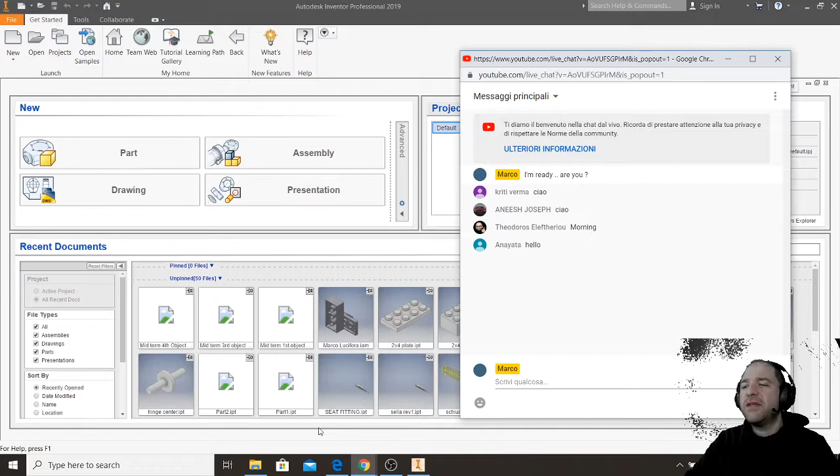Just in case you want to know, it's been 10 minutes that I was talking to the camera, and I thought I had removed that screen that says 'live in 10 minutes.' So I was already talking to the camera, and I didn't realize no one could hear me because I wasn't really streaming anything. There was just a screen saying 'live in 10 minutes,' but I was already talking, pretending, 'Hey guys, are you there? I'm ready, I'm pumped,' and so on. Imagine. It's fantastic.

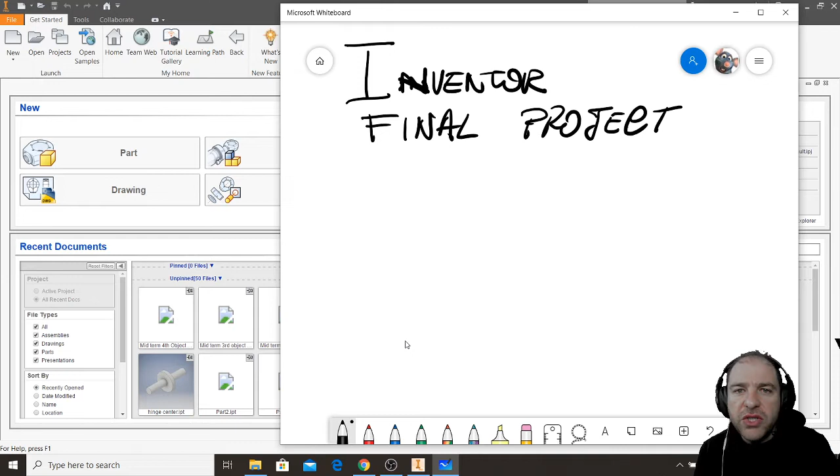It will be this. All of you may have a slightly different interest in using industrial design. There are maybe students who are more into furniture design, product design, and design of electronic things and stuff like that. So what is my goal? My goal will be you

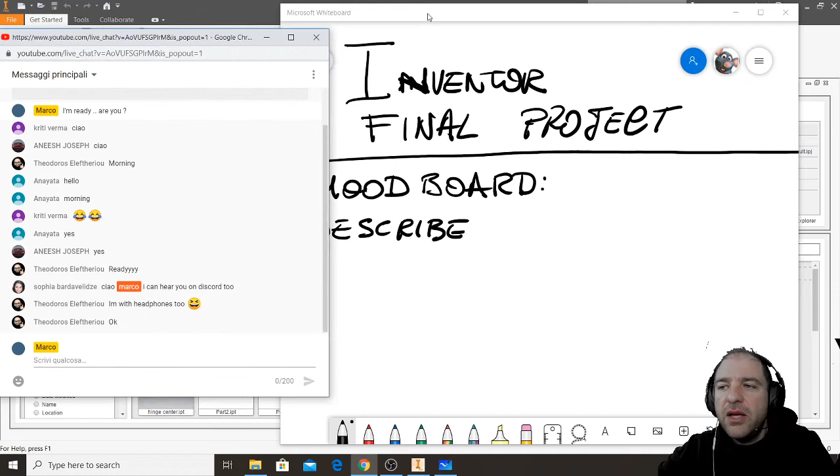need to create a mood board, and in this mood board you have to describe an object of industrial design that you are interested in designing. What it means: let's say someone wants to make an armchair, someone wants to make a bookshelf, or someone wants to design a lamp. Whatever is the object—a boat, a vehicle, whatever—you have to describe the object that you would like to develop in order to use it as the object for your final portfolio.

So when you go to a client, a potential client, and want to show your portfolio, instead of having all the same project like school projects, this will be something a little bit more personal, something that comes from your particular design interest.

You have to start by explaining which kind of object you would like to design, using whatever method you prefer. What it means: you can download existing pictures, you can start designing your own personal object by making sketches, by making very rough 3D models.

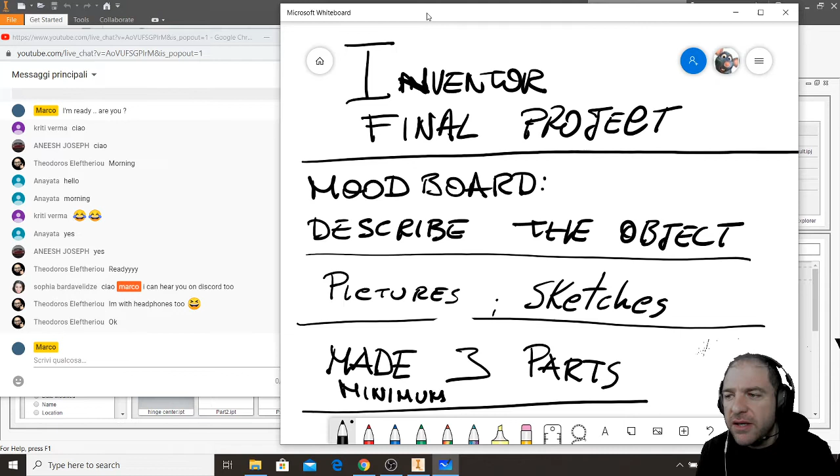For example, last semester I discovered that all my Inventor students made lamps. What is interesting is that they were also able to make prototypes of their parts by 3D printing some pieces. Since I haven't forgotten that this is also a class about 3D printing, I would like to make a very interesting experiment.

You have to design your piece, and after the break we will make a specific lesson about 3D printing. I will explain what you have to do, which software you need, and after the break, when you design certain pieces, I will try to go to the school and 3D print some of your small parts, so that during class I can rotate them into the webcam, show you the criticism, show you the main problems that the 3D printing process has, and so on.

So we will try—I will try to 3D print some of your objects, print some of your objects.

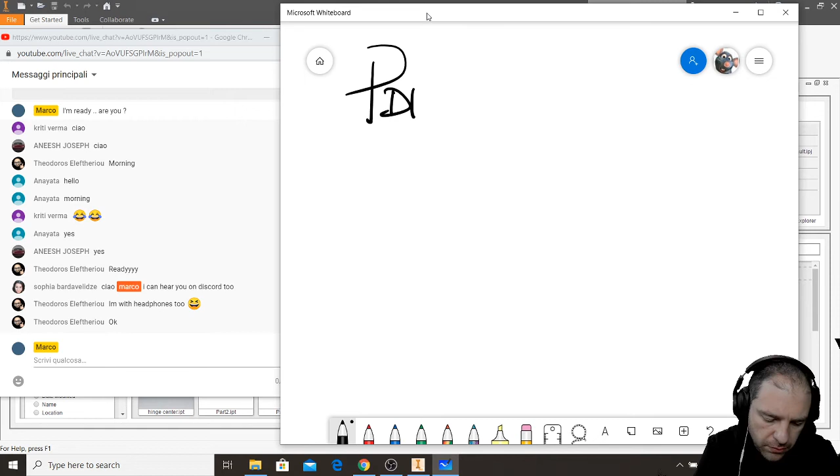And this is my goal. Okay, so last but not least, to have all complete information: the mood board you have to create, and this is what you have to do for these two weeks, must be in PDF format, and it has to be made of at least 3 pages A4, containing all information needed to understand which project you want to create. Sketches, information, description of material, description of the function, if it is an electronic device or not.

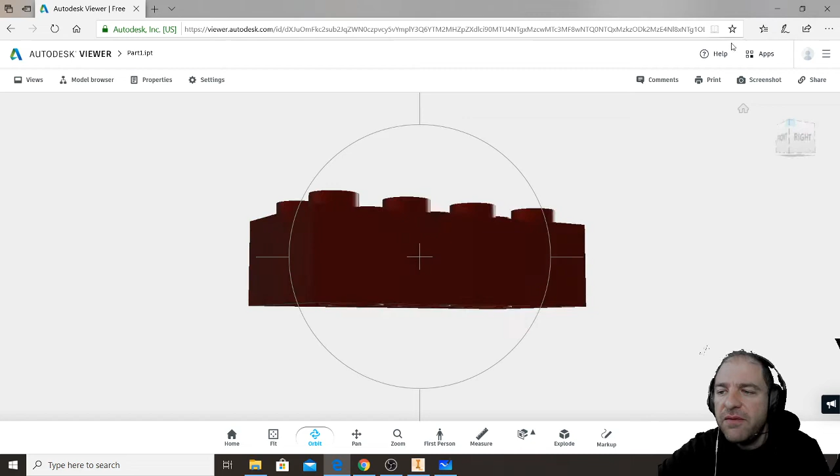We are almost there. And basically, even if I don't have the software with me, or especially if you are working with Mac and Windows and you don't want to switch from one platform to another, boom. But in here you have also the chance to check whatever Autodesk file format for free.

This is also interesting because some students ask me, can I keep like 2020 and so on? And I say yes, because it is always possible to open files even if you don't have the app. And you have some interesting tools, like you can orbit, pan, zoom, but you can also measure. So I do this not only to open files, but I can also check if they are correct or not. You can also make sections somehow, press escape, that I forgot how to do it.

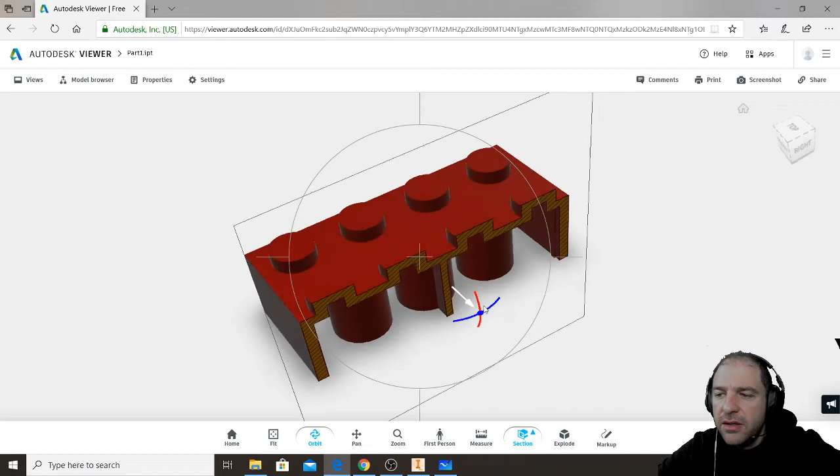Exactly here. Then I can rotate, for example, like this. Perfect. Then I can use the Y plane, I can rotate it, and exactly slide the section plane to see how this 3D model has been done, and so on. So this is a useful resource.

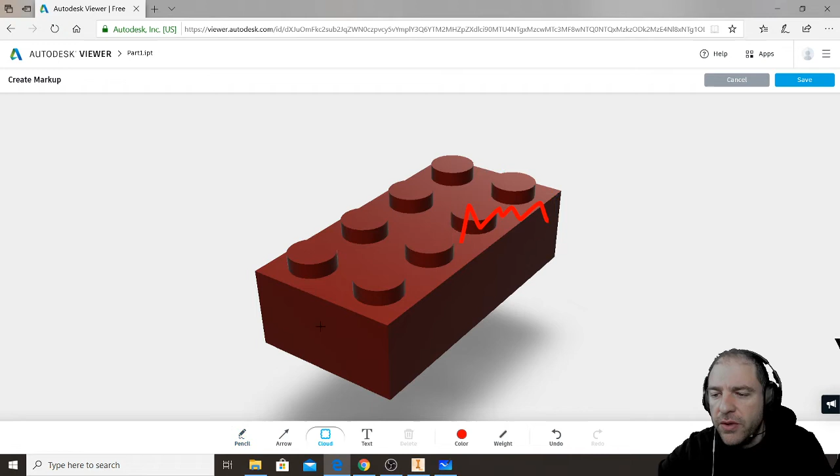If this was an assembly, for example, you can explode it, so you can split all parts. This unfortunately is just one part, so you can't do it here. You can also mark up, adding notes and then save these notes so you can use it as a reviewing tool even if you don't have apps with you. You can add cloud shapes, check marks, arrows, and so on. Okay, and this is this simple free tool that you have.

You have also, when you log in here, more web apps that you need to know, like BIM 360 Team, so if you are running Revit projects, you can share things with other people. But what is more important is that you have also Autodesk AutoCAD 360 and Fusion 360, which are basically AutoCAD online, and Fusion 360 is simply more or less a web version of Inventor. So again, if you don't have your laptop, whatever computer you're running, Windows, Mac, and so on, these are web apps and you can also use them.

For example, now I don't need it, but with the viewer I'm only able to see the file. But if I use AutoCAD 360 or Fusion 360, I am able not only to view but to open this file, adjust it, maybe save it with another format, and export it, and use this part for the software that I have. Okay, so this is extremely important because web apps, just by having a decent internet connection, allow you to work wirelessly, no matter where you are, no matter which software you need, Autodesk related of course.

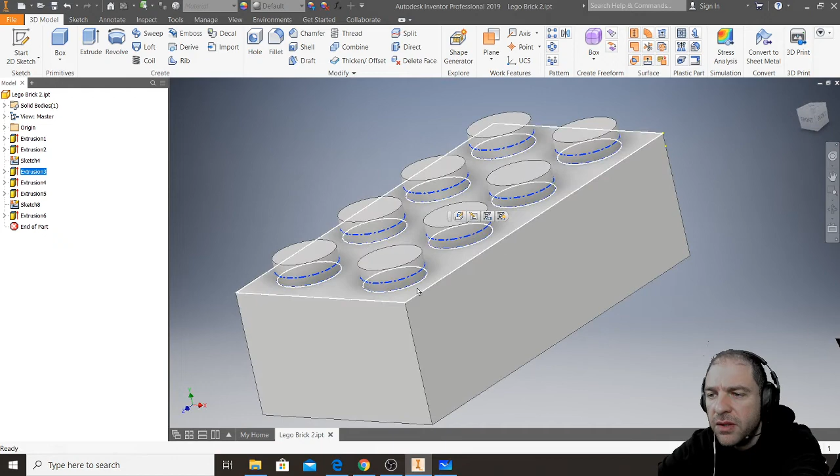So this is an extrusion that goes to... this is another extrusion made by these parts in here. This is another extrusion. These are other extrusions. This is a sketch, this is this. Okay, this is interesting. Look, to see how this object has been made. I mean, those are copies of your files, I'm not ruining any of your original files, but I want to show you this.

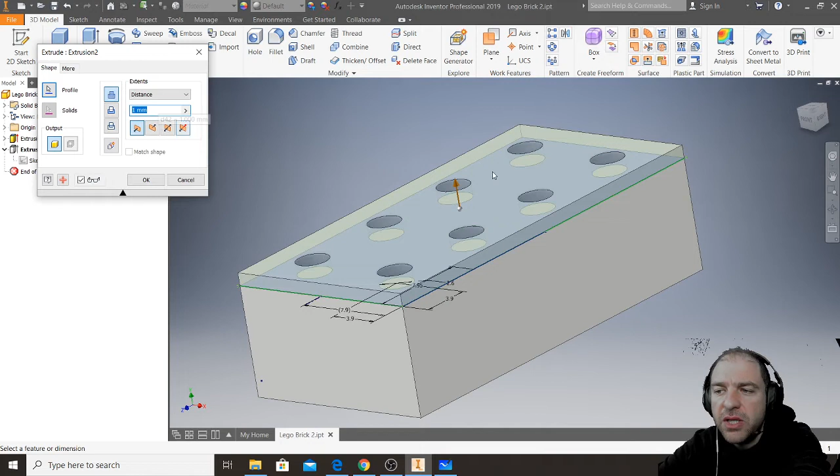So if I check how the file is made, I will discover that this is the cap that has been extruded 1 millimeter. While, and I can delete it now, this is a very complex extrusion that has been made by drawing this entire sketch with dimensions, okay? And then it has been pulled up.

Where is here the downside? I mean, why, maybe this is quite correct, but why does this become something a little bit complex to manage? If I want to make another Lego block, this is the one, let me open the pen also, big pen. This is a brick that is called, this is called 2x4 brick.

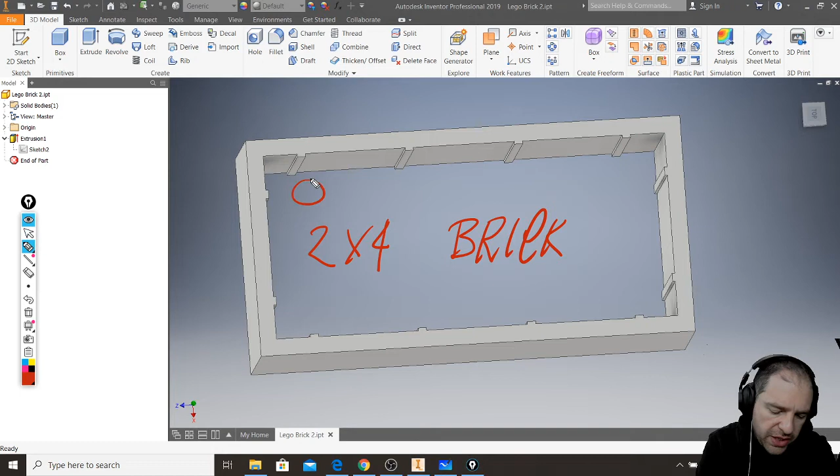In Lego dictionary, this has a very precise meaning that says it is an object that has 8 cylinders. There are 2 on the short side, 4 on the long side. It is called brick. So what it means is that the height of this will be a multiple factor of 3 elements.

And in Lego there are bricks and there are plates. A plate is one module. If you put 3 plates on top of each other, you obtain a brick. So there is something like a modular aspect of Lego blocks, and also they change dimensions. So there is like 2x2, 2x4, 2x3, 1x4, 1x3, 1x6, and so on.

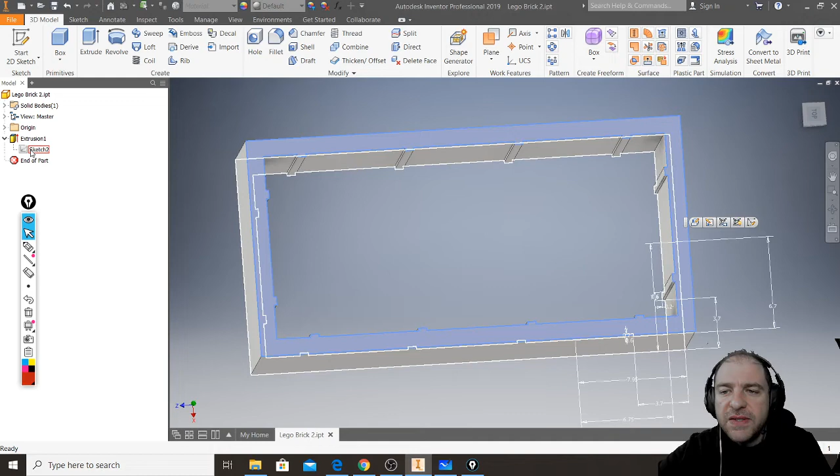So where is here the only small negative aspect? The negative aspect is that if I want to change this and make it shorter or longer, this sketch, look, contains all these details, and it's simply a sketch that will take forever to be modified, because if I cut it, let's say here, and I want to make only this part, I have to cut it, move it, delete this small part, delete this small part, and so on.

Let me show you another interesting thing. Not because it is better, but because it is a little bit more reliable.

Okay, so let's go. Let me show you how I did one of these. That is this one. Look.

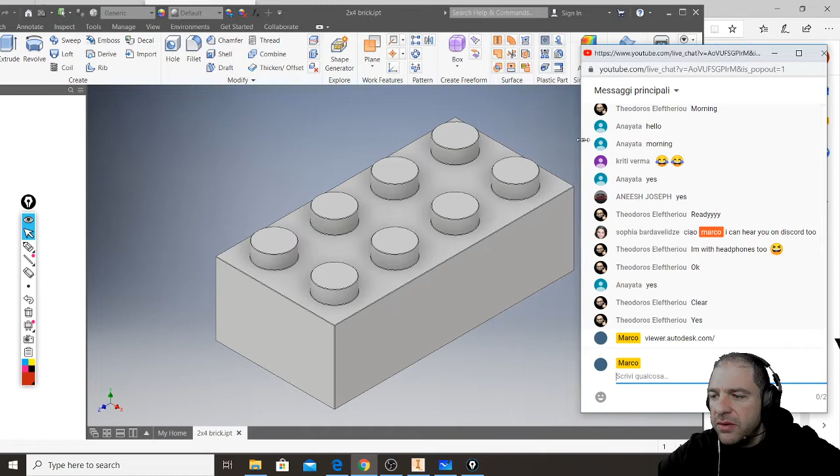So let me show you my Lego block, just because it can be interesting to see other ways to do the same things. First of all, I have added a chamfer simply because I have a lot of Legos and I know that bricks are sharp, but not that sharp. So this is nothing really important, and we can remove this.

Then, the last thing that I have done is I have made an extrusion. So let's start from the last step. And what is this extrusion? These extrusions are these small elements in here.

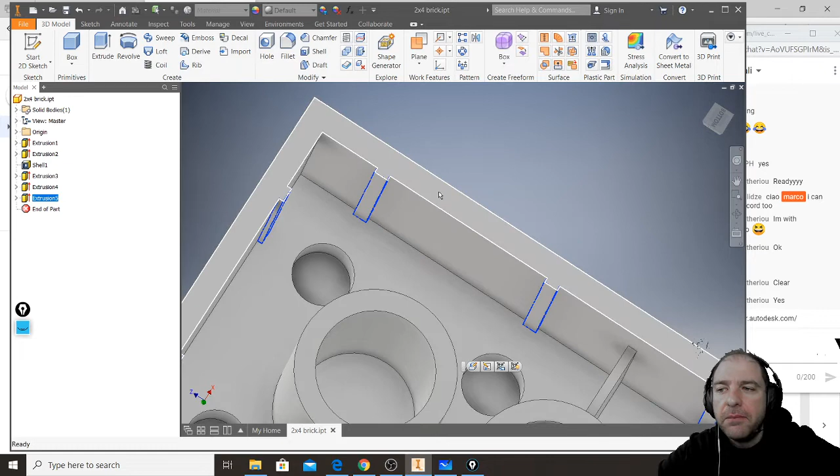So I haven't created this into the same sketch of the base, simply because if I want to make another block, they are independent from the main dimension. And if I double click and open the sketch, you will also see how the sketch is made.

That is particularly interesting, that is this. I have technically made one of these rectangles only. So I have made one rectangle, then applied dimensions to this rectangle so that I fix the side, this one and this one, and this cannot be modified.

And you can see that my sketch is blue, while the previous sketch was green. This is extremely important because if the sketch is green, it means that if you move a part by mistake, you can still deform the object, while when the sketch is blue, you can't.

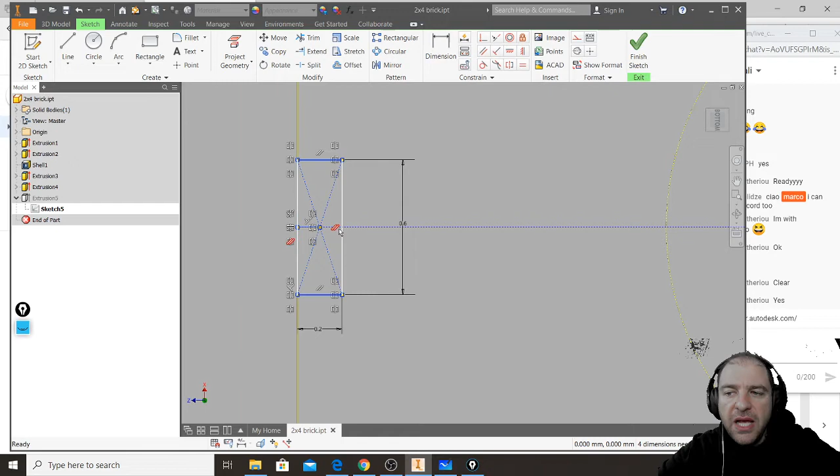Simply because in reality I have made this rectangle, then starting from the corner I have made a line that is 45 degrees angled.

And then what I have done is, instead of drawing manually this rectangle here, I have used mirror to make this one. So this one, in reality, is an object created by using these axes as a mirror, and it is a perfect copy of this one.

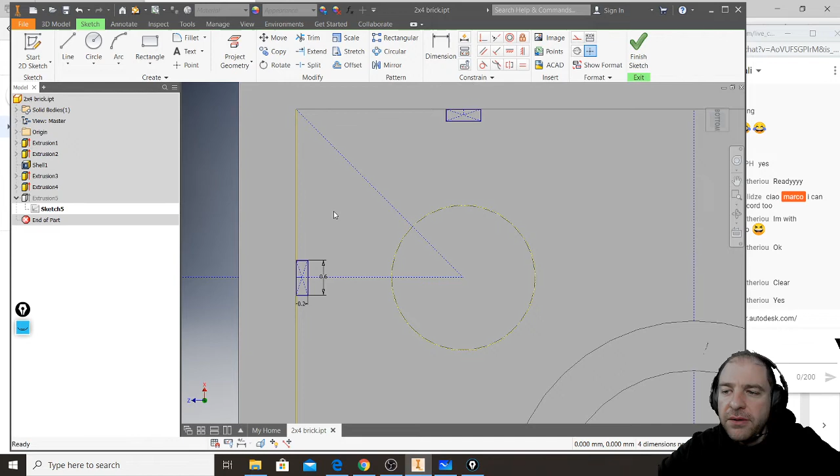Then I have selected both, selected these two rectangles, and again I have drawn this axis, used mirror, boom, and I obtain the lower rectangles. Then select only these two, make this mirror and I create this one.

Then I've selected them all, drawn the middle axis, and mirrored all these other parts. So technically I have drawn one thing only, and then I have just repeated mirror, mirror, mirror, mirror, boom. In a second I have all these pieces.

Why this? Simply because if I need to change dimensions, modify something and so on, look, I can just move... and I can't, because now this is also stuck here.

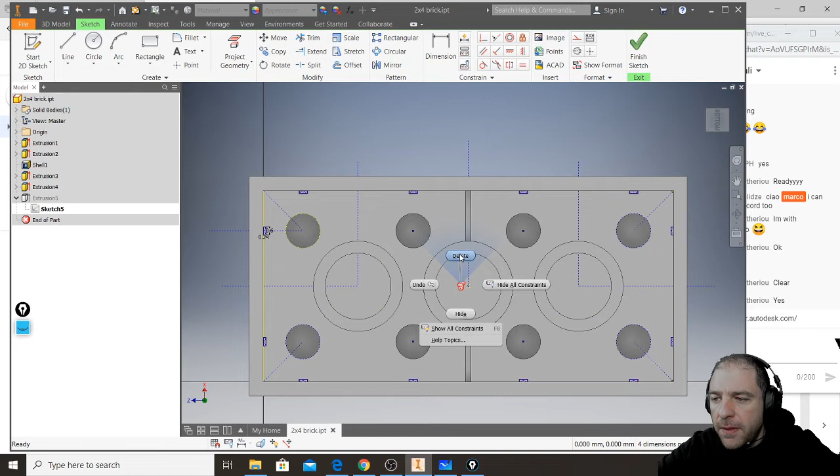Let's pretend that this constraint is not here. But if I move one mirroring axis, you will see that I am able to quickly adjust all my attached objects.

So I create parametric relationships between all my pieces. And this is just for this lower part. Let's see what I've done here. This is the same as your classmate, I've just made an extrusion, nothing fancy.

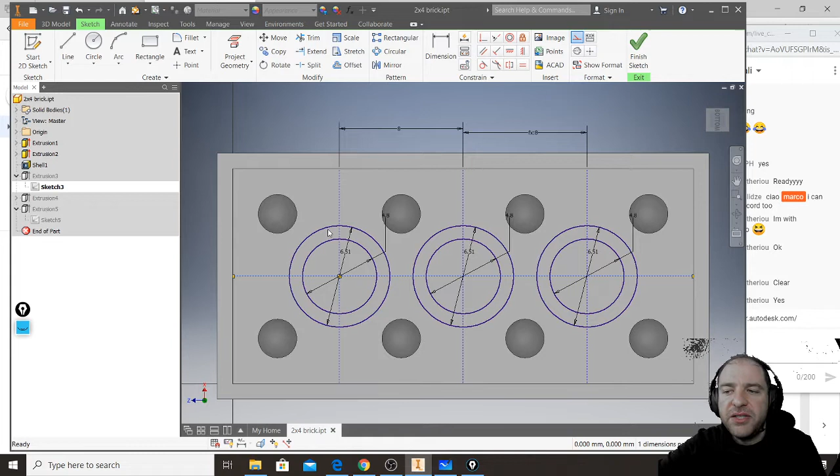And let's see here, another extrusion, but I want to show you how I did it. Because again, what I do is I create a lot of construction lines. So instead of drawing things randomly into the plane, I create lines that are connected to my previous geometry, and then I attach sketches to them.

I'm explaining now, then I will make a real example, but just to explain what I did. And then this is the fun part, that is how I've made the main brick. There is something that is unbelievable.

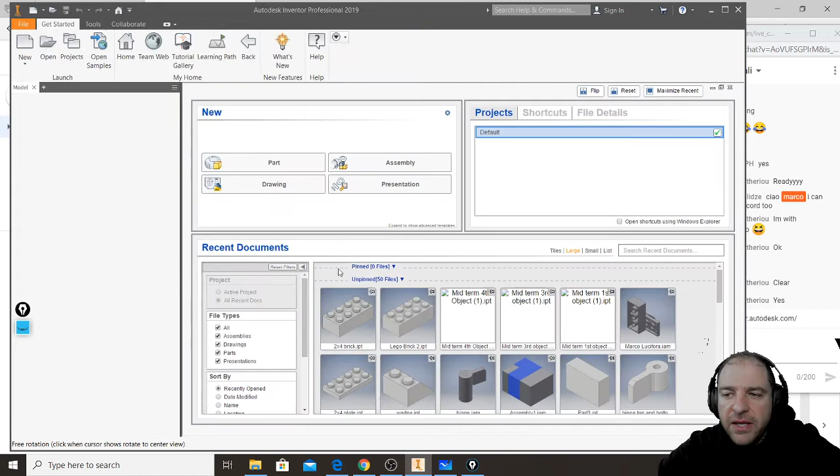Because if you remember in the example that I opened from a student, you had the lower part, upper cap, and those 8 cylinders extruded up. And if you see instead, I have a lot less steps, but the result is basically the same. So I want to show you from scratch what I've done, because I think it is particularly interesting in order to understand different ways to use Inventor. See this. What I have really done is this.

Starting from the upper plane, I started from a box. I have dimensions here, so let's use real dimensions. I made a box using the box tool with dimensions 31.8, tab to go to the second value which is 15.8. Then the box asks for height, and the height is 9.6. Boom! This is first.

Now I have to place my 8 cylinders on top of this face. I could just draw them, but let me show you what it means creating parametric relationships between elements. I select the face where I want to draw and click Sketch. I know I have to make 8 circles, but not just anywhere—there is a very specific distance in between.

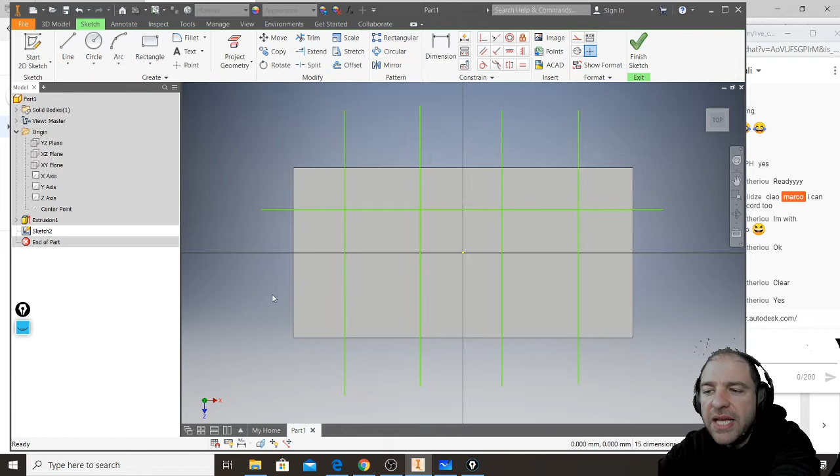So what I do in reality is first this: I create axes. These axes will create the center position of my circles. I can use mirror too, but let's keep it simple. The problem is that these kinds of shapes cannot be extruded because they are open shapes.

So what I have to do is make them construction lines. Construction is a tool, a button you find here. If I set my lines as constructions, they won't be used by features like extrude, revolve, or loft. I select them once drawn and click this tiny construction lines button, and they become barely visible and dashed—but not like a center line used for mirror. They are construction lines, thinner.

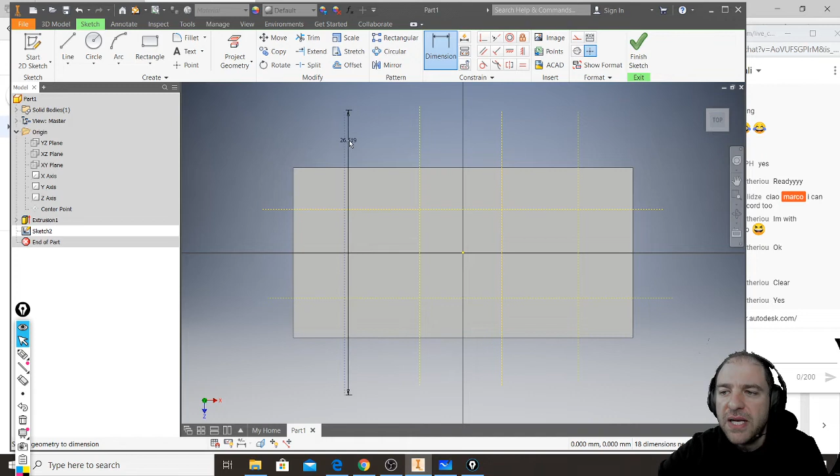After this step, I read from the drawing and discover that the distance between all these construction lines is 8 millimeters. So I click one line with dimension and another line. This dimension is called D4. I type 8, that's my value, and click OK. Once I've done this, I make another dimension, but instead of writing 8, I type D4, so that if I change my mind, they will change in a parametric way.

I measure this, and this is D4. I do the same in this direction, and I call it D4.

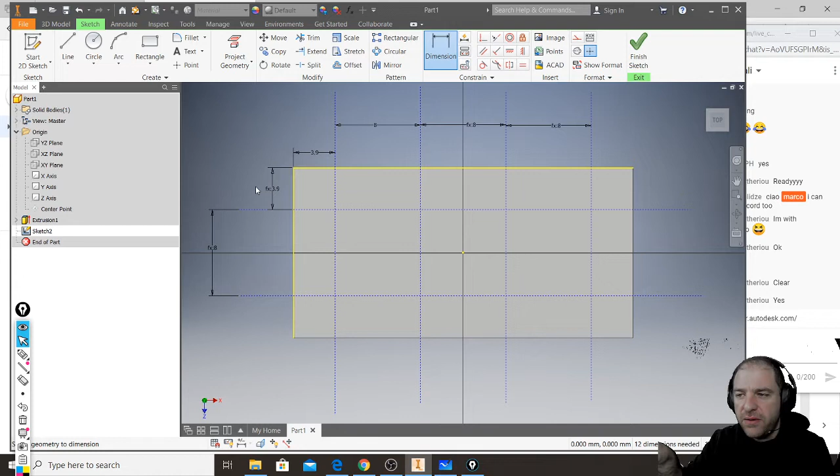I have almost done. I need to center these lines properly into my final drawing, and I can read that the distance from here to here is 3.9. I can also read that this dimension is called D8. So I move this 3.9, and I do the same by measuring this dimension here—it has to be 3.9 again, so instead of writing 3.9, I write D8. In this way, my axes are perfectly placed into my object.

What remains is to make one circle, only one, that starts from the intersection of two of these construction lines. I can read the diameter, that is 4.8, so I will type 4.8.

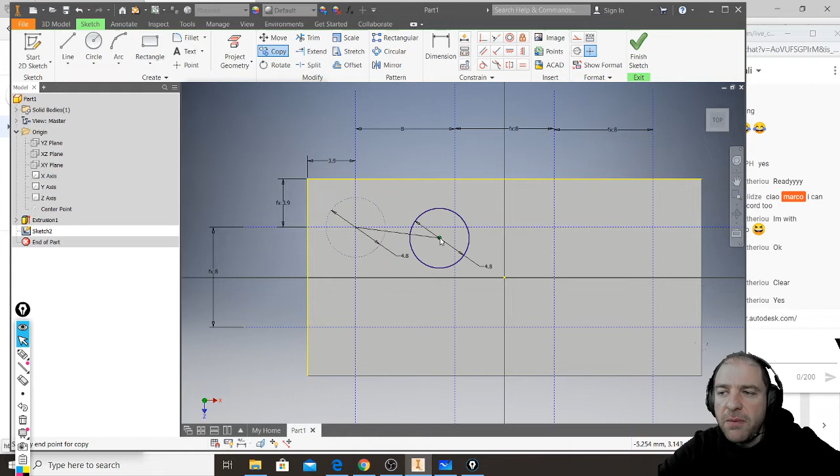Perfect. Now I don't draw all the other circles. What I do instead is this: I press escape, select this circle, and use this simple tool called copy. Copy works like this—I select it, click base point, and my base point is the center. From there...

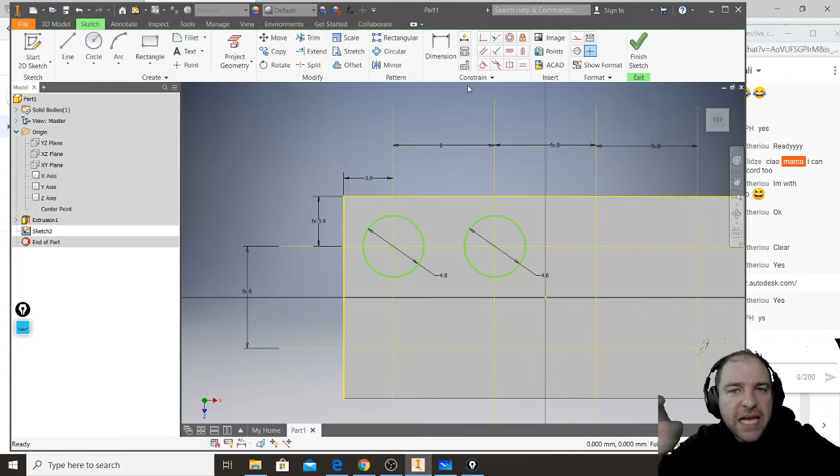I don't know why my mouse is becoming crazy. Wait a second... can you see me? Can you hear me? Everything is working—for a second I thought Inventor was crashing. Let me know if you can see me, hear me, and everything works. Give me feedback that you can hear me. Yes, perfect, sorry. For a second Inventor started flickering and I started freaking out.

So I was saying: I select these, click copy, from the base point that is my center, and I simply put all the other circles. If I'm not precise and by mistake I do this—this is not the end of the world. Look, I will do this on purpose.

Just to show you that you can fix these in a better way. First of all, I have made copies of all my objects, and this is perfect so that they are the same. If I've made this kind of tiny mistake and I'm not sure that the center is perfectly attached to that intersection, this is not the end of the world, because with the menu called Constraint, you can use Coincident Constraint.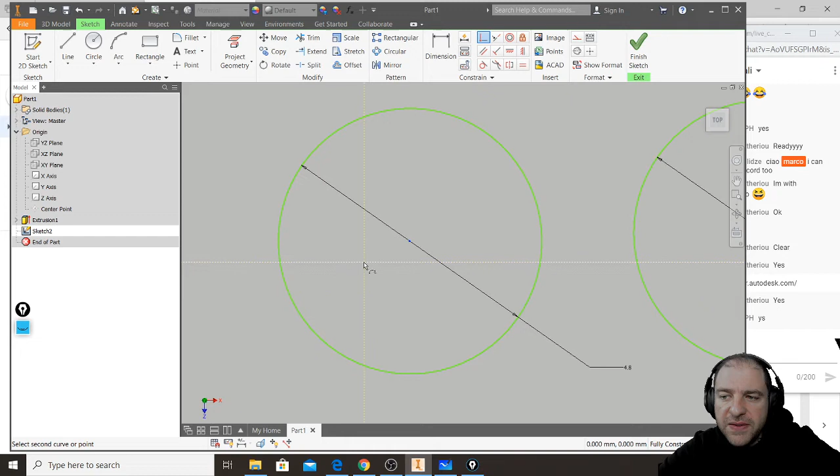So I click Coincident, I select the center of the circle and then this intersection, and then the center of the circle and this intersection. Now you can see the difference: my circle has become blue, not green like the first one, because now my center is stuck to the vertical and horizontal line. This is perfect, because if one day I realize I need to move this line, wherever I move it, my circle will always follow.

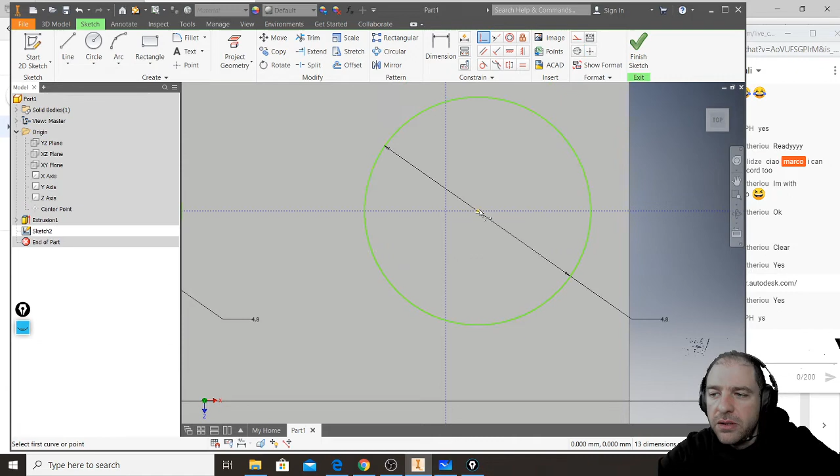So let me quickly fix all these other circles by using coincident to a line and then again coincident to another line, so I will be 100% sure that the center of all these circles is snapped. This was already there, but just in case. Okay, and I click finish.

Then check this. I read that these objects must be extruded. I can read that the extrusion is 1.8, and I will type 1.8.

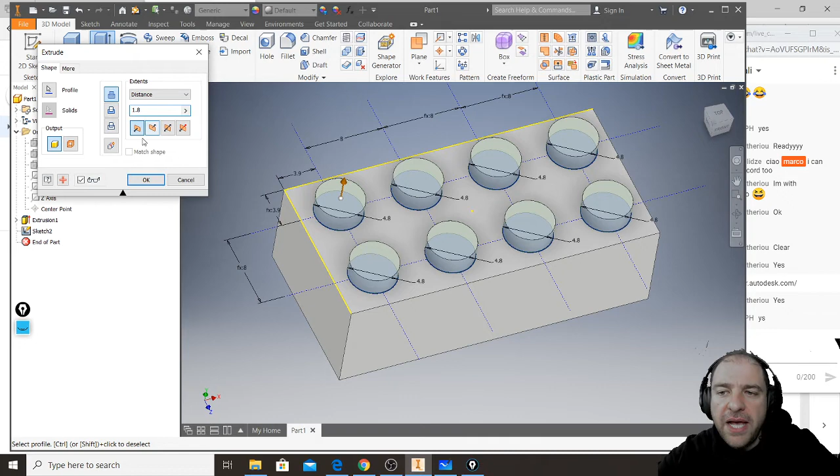And I have this particular object. Look, this is something, and you can see that I've made just two extrusions. But if we open our original, the PDF 2x4 brick, we can see that this object is hollow inside. This is the original PDF. We can see that it's hollow, and it's particularly complex because look at the shape inside. It has to be something like this, following the outer shell, and it looks like a complex part, while this is super easy.

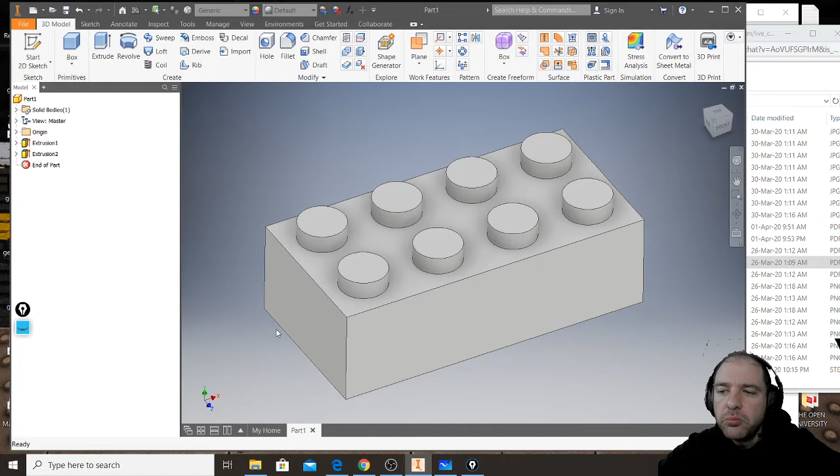So check this out. What I do is simply select this face, that is where in reality there is the hole to mount other bricks. I use the tool called shell, and I type - I think it was 1.2 - the thickness that I want. I click OK.

Ready for this? And in one second, you have the brick that is also hollow inside, and it has exactly those small holes inside these cylinders. Till here?

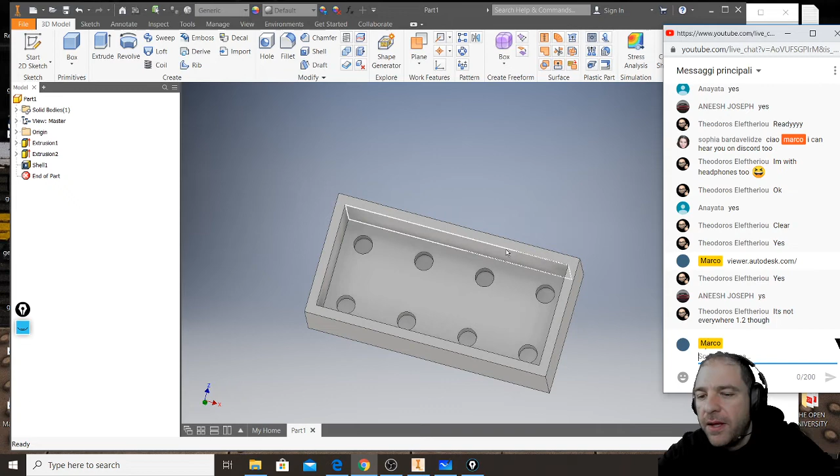I know that some of you can say it's not 1.2 everywhere, but I was prepared, because basically, let's see - if I remember, this basically is 1.2 in vertical areas, and let's see if I can make it in wireframe. Exactly. So your classmate says it's not 1.2 everywhere. In reality, basically, it is.

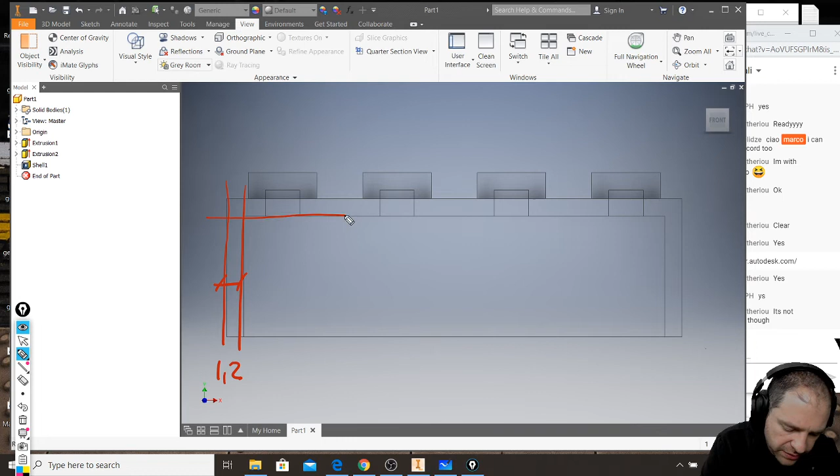Let me sketch. It is 1.2 only here. This one is 1 millimeter. It is not 1.2, it is 1 millimeter. Is it true? Let me know. Is it true or not?

The answer should be yes. And do you want me to fix also this or not? Holes are 1.1. Where this is written - one point one. I don't trust you.

I don't trust absolutely what you're saying, because from my drawing, if it is... no. Yes, I have this one. So I have - someone says 4.8, 2.6. That is 2.2.

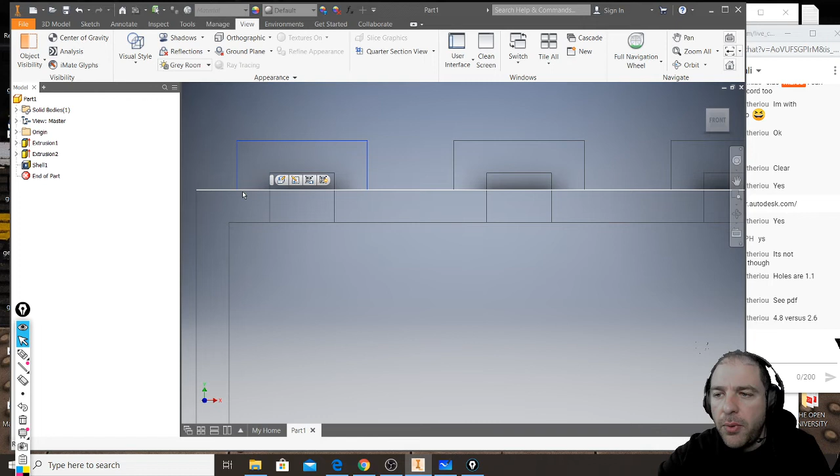You want to challenge me or whatever? I mean, because I will win in any case. So if you want to make all of these, it's not a problem. So someone says that this from here to here should be 1.2, and from here to here this should be 1.1. That is fine. So let's see other things that you can do.

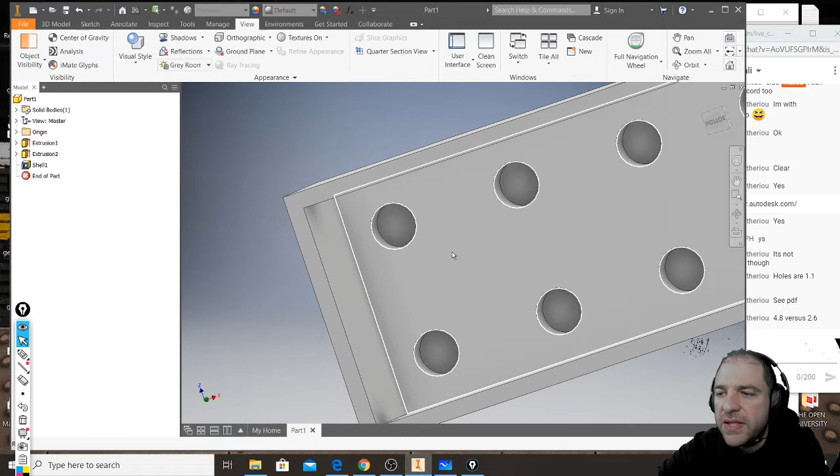There are these things you can do, and I will go back to my normal visual style. So what we can do, if we have this kind of different sizes, is start by giving an overall shell, and if we want, use the minimum thickness. So I will use 1. In this way, everything will be 1 millimeter thick, while here we need to make something a little bit thick, and here something a little bit thick as well.

So if we want to do this, we can select this face, and look, I won't draw anything new, I will simply do this. I select this face, I make a sketch, and I already have all these circles, I don't need to draw them again, absolutely not. So what I will do, after selecting this face, is create a copy of all these circles by clicking Project Geometry.

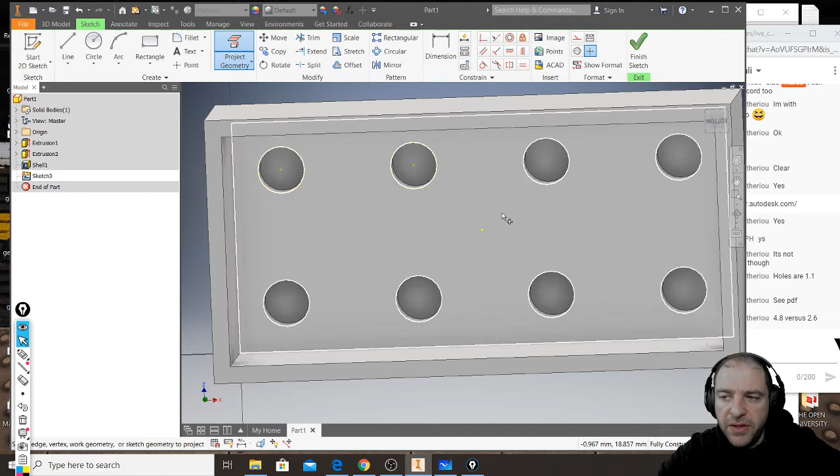So I click this edge, and you will see these yellow circles appearing, simply because in reality those yellow circles are circles that I'm not drawing. What I'm doing instead is simply creating them from original edges. Why this? Simply because in this way these edges always depend on the original 8 cylinders I created, and if I move one of my cylinders, I will also move the inner circle.

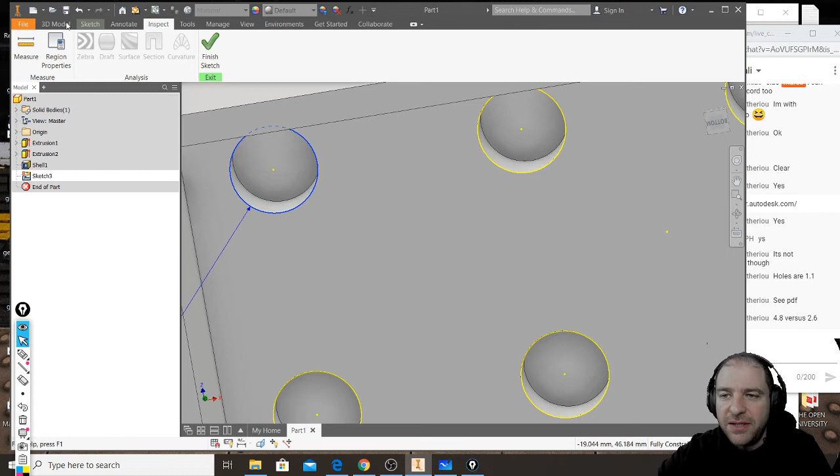So what I will do then is, just to check, if I measure them, they are diameter 2.8, but your picky classmate said they must be 2.6. There is not a problem. So in my sketch, I will use offset. I select the object and I type - should be 0. It has to be, wait a second, I need my calculator.

So they are 2.8. They must become 2.6, divided, that's to be 0.1. So the offset must be 0.1. Perfect. And I will repeat this process.

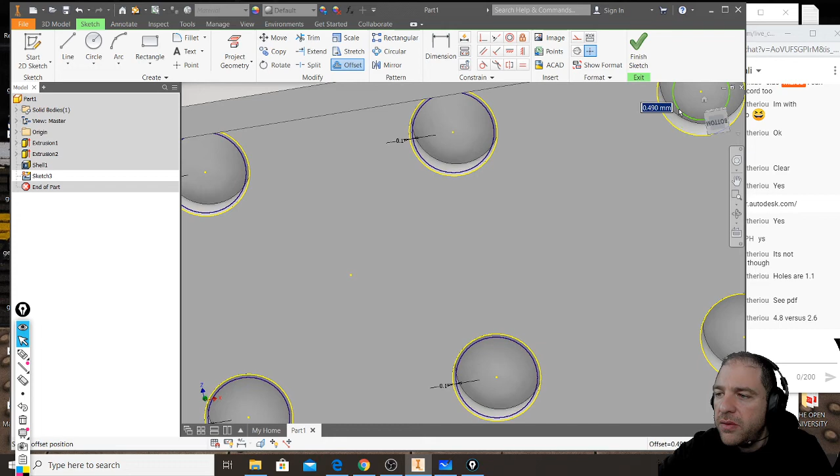0.1, 0.1, 0.1, and 0.1. Look. 0.1 and 0.1. Perfect! And I can finish the sketch.

Then I will click Extrude. I select this space to be extruded. Okay? Of course, direction is wrong.

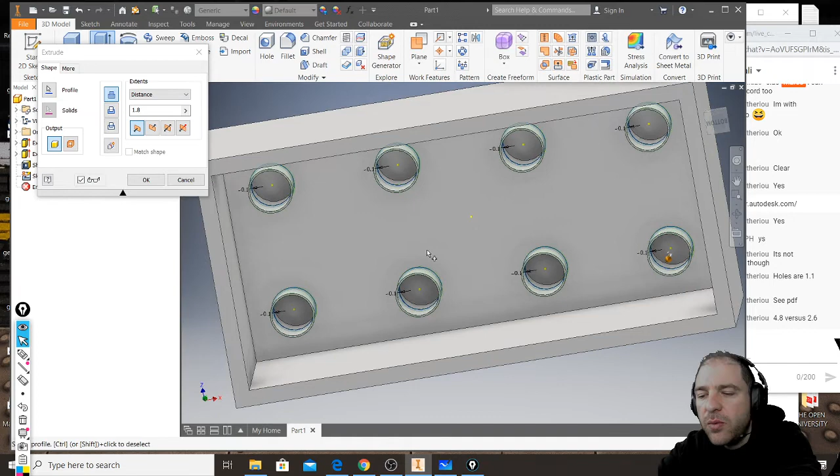But I want to show you that I won't type any direction. So what I will do when I want to extrude is that this extrusion must go from the plane that I'm working on till this face here. So instead of using distance, I will click the option To, and I will select this inner face, so all my extrusion will reach the inner face of my hole. Okay? So now I have fixed inner holes.

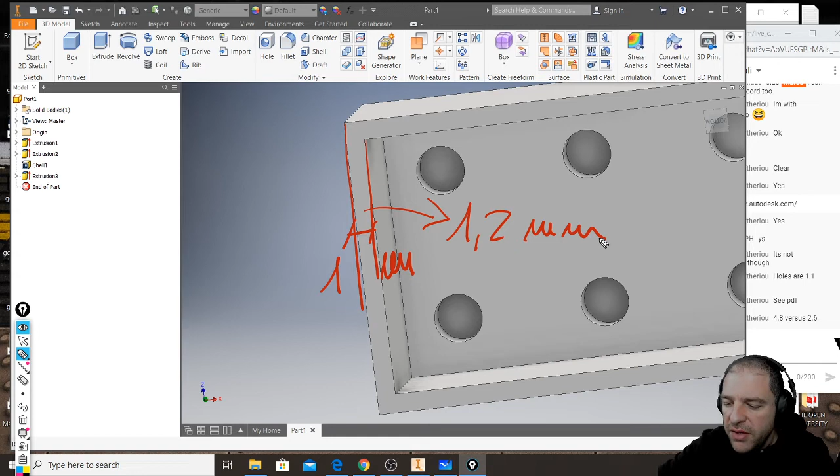I have fixed these. One last thing that remains is I need to make these walls. Now they are 1 millimeter thick, but in reality this must become 1.2 millimeters thick. Is it true? Yes. So let's do it. And I will simply repeat the same exact step.

This time I will select this face. I click Sketch. Again, I simply need to create a copy of this rectangle, but I won't draw it again. In reality, I click Project Geometry, select this line, this line, this line, this line, so that I have obtained these yellow projections without drawing them.

I select Offset. This time the offset must be 0.2. So I select this rectangle inside and I type 0.2. Okay? So that I can finish the sketch.

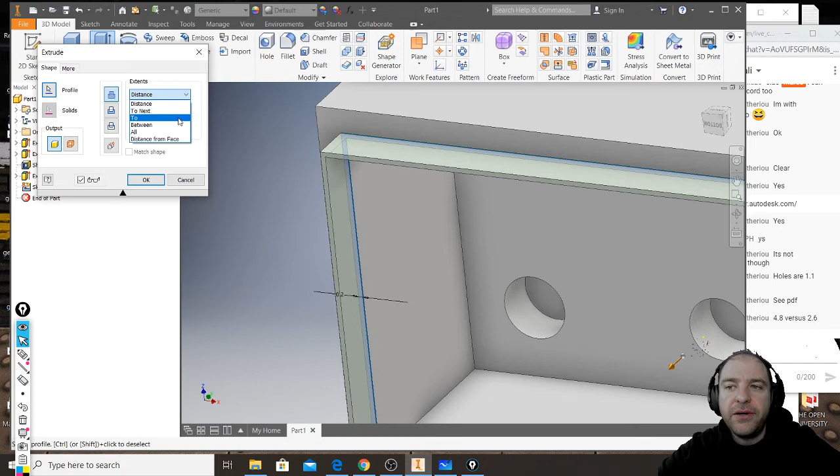And I will extrude again only this small part, but again, I won't extrude it in this direction, while I will click option To, take care, To, and I click this face here, click OK, and now I have the brick that has also these three completely different thicknesses for vertical, horizontal, and cylindrical parts. Okay?

Till here? Okay, let's say that is yes till here, so that I will show you how I've made those small holes.

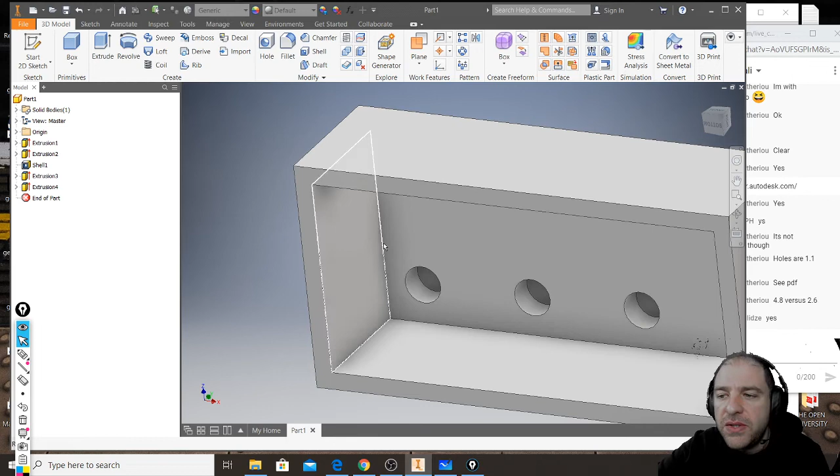Oh no, even better. Now we have to draw those three empty circles in between. So let's see this. In here there are three empty cylinders. There are these: 1, 2, and 3. So again, these are very simple now to be made, because look here.

I have a lot of stuff that is drawn, and what I will do is simply project this, and that, but I don't want to extrude them. I just want to use them as reference, as well as projecting this geometry here. Then I will select them all, and I will click that they are construction.

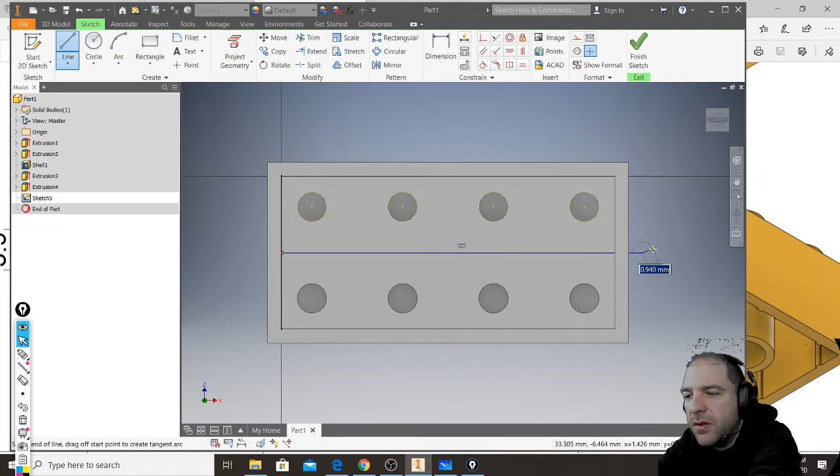Then I will draw other lines. One that will start from the midpoint of this shape that I have projected. Then I will make another line from the center of my projected circle till this center, and I will make another one like this, so that I find this perfect center.

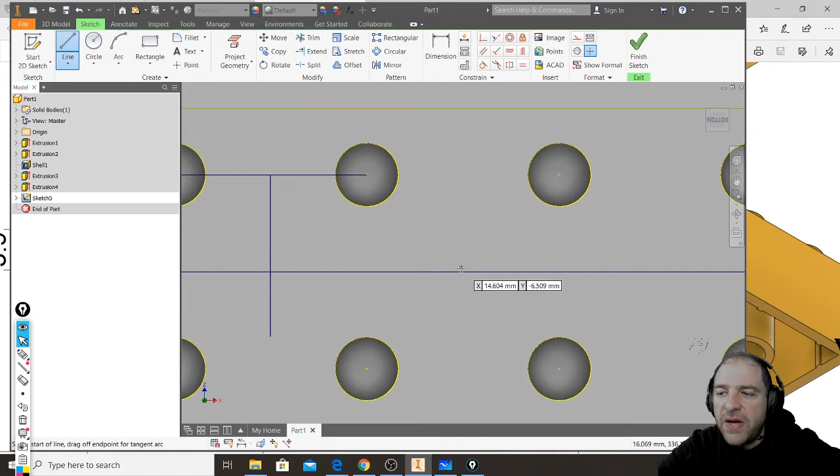Another way that I could do, just to show you how many possibilities you have, is you can also project this circle here, and for example, to find this point, you can create these angled lines. There are diagonals, so that you find this precise intersection point. But again, this is construction, so I select all these lines and I make them geometric construction, this as well. And I don't have to find type, dimensions, and nothing. All these construction lines are snapped to my pre-existing edges.

So what remains is only I have to make a circle here, and I will dimension this as 6.51. 6.51. Perfect.

And then make another. I can do offset as well, but it takes forever. So I make another circle, 4.8. Perfect.

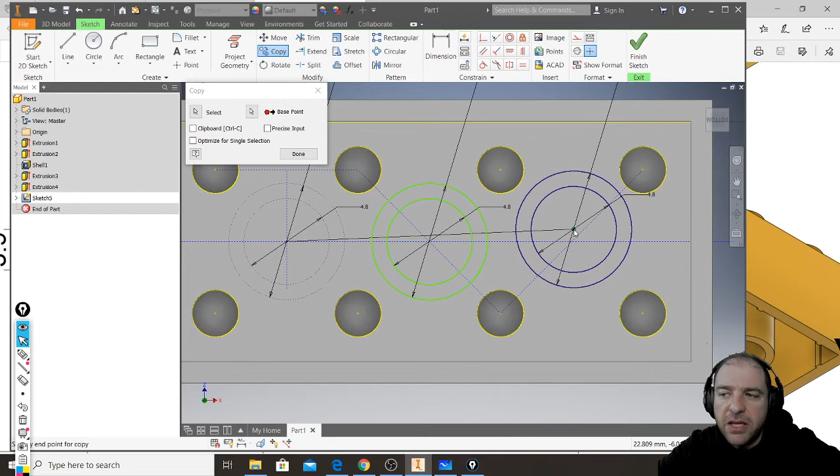Here, maybe again, let's say I'm not that good. I click it here. Oops, I've made the mistake. No problem.

Select both. Click coincident. It's one by one. It's okay. So this is coincident here, coincident there, and this is, oops, wait a second, and then this is coincident here. It's already there. Okay.

Finish the sketch, and I will extrude these, but I haven't typed any number. And you can also see that even if my construction lines are intersecting the shape, when I select the space in between continuous lines, everything works. I click again to this face, so I don't type the distance exactly, and they reach this part, this beautiful element. Okay?

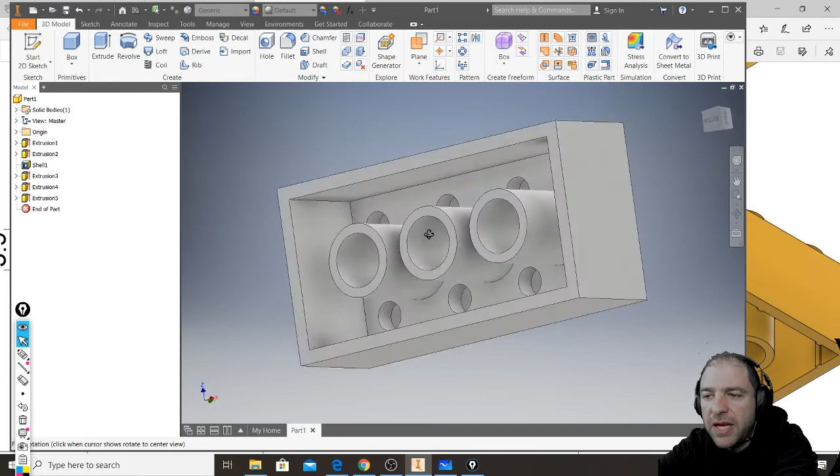We have almost done, and then see the magic. I select this face, I make my last sketch, where I draw a rectangle.

Then, into the rectangle, I give dimensions. Let me remember, let me see, these dimensions are 0.2, and this one is 0.6.

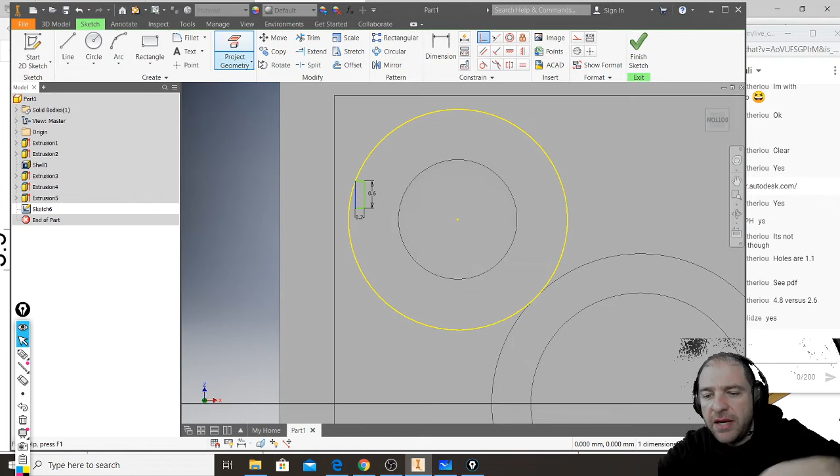Perfect. And now look, I click coincident. This must be coincident. I forgot to project this line here. And again, this line is useful only as construction. So now I will simply select the rectangle and make that this point is coincident. Here, no, you don't like it, so it's collinear. So this line is collinear with this.

Sorry, by mistake, without wanting, I have snapped this to the circle. I'm so sorry here. No, sorry, my fault. Let's put the rectangle somewhere else here, exactly.

And then I said 0.2, 0.6, and then this line is collinear with this, exactly. And then from here to here, the distance is...

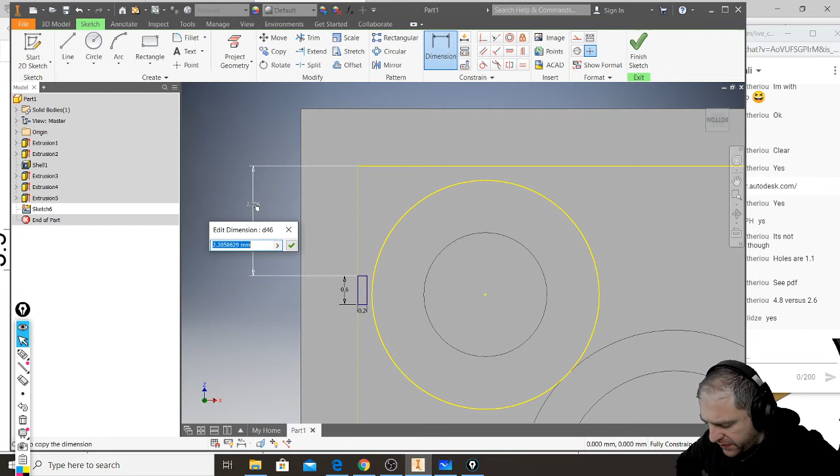We don't know this distance, and instead of calculating, it is written that center of the rectangle matches center of the circle. So I draw the center of the circle, and then let's see, I select the rectangle and I make coincident. Midpoint must stay there. So I don't know the distance, but geometrically this is correct.

Then I finish by doing this. Look, I draw this line, and I make it construction. And I select this. I click mirror, mirror line, this one, click apply, boom, and I have this one.

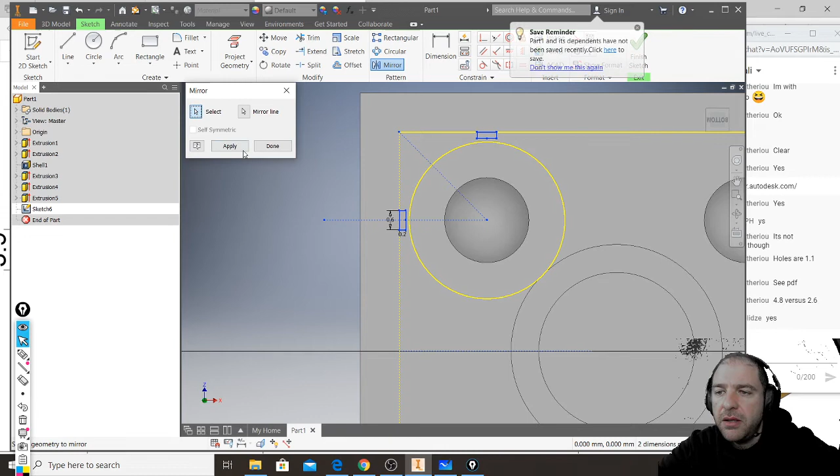Then I draw another construction line, this one. It has to be construction, so I select it and I make it construction. I select both rectangles, make mirror, select mirror line, apply, and I get my two rectangles down there.

I'm almost done. I create this, and also I create from now this, additional construction lines, so that I select only these two rectangles, mirror, mirror line, this one, apply. Now I select all of them, mirror line, this one, apply, and I have created all these little rectangles.

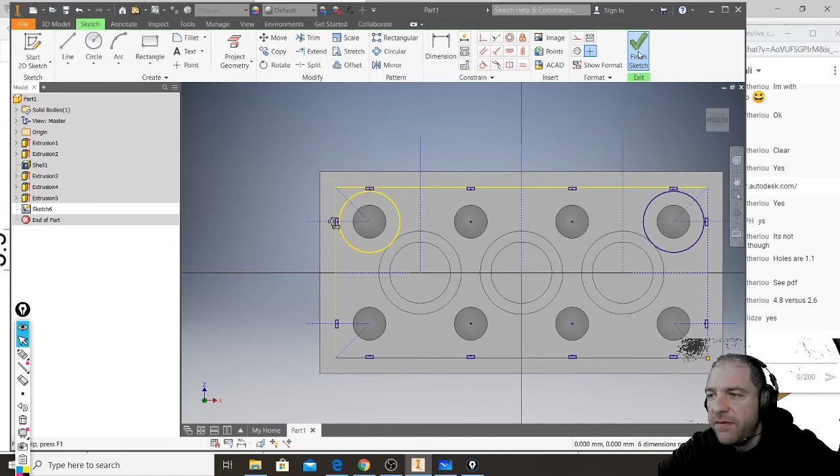And you will see in a second why I'm making these rectangles as separate from the sketch. Let's say I finish the sketch, I extrude them.

I have almost done. I select all these tiny rectangles. Forgot to make the circle as a construction, but it's okay. To this inner face. And I click OK. The piece is almost done.

Technically, the only thing that remains is this extrusion in the middle, but I know that you don't want to see it because it is just an extrusion. It doesn't really change anything. Okay?

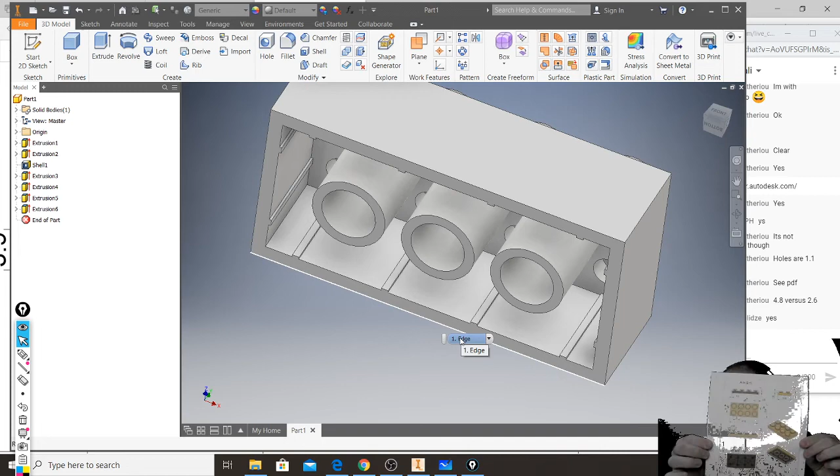But ready for this? Because this is how I will make the 2x4 bricks, and check how to make, starting from here, the piece that instead is this one. Let me know if you can see it. That is a 2x4 plate. Because once that I have made all these steps and all this effort in creating this kind of complex thing...

Really I have no willingness of doing everything from scratch. So see what I will do. I will save this and I will call it live 2x4 brick.

Then I click File, Save As, and see the magic. I will save this file just with another name, so I create a copy, and I will call it live 2x4 plate this time.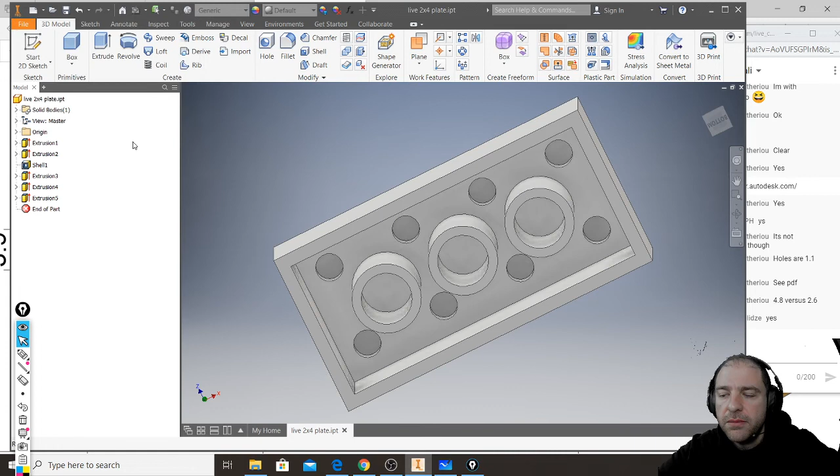And what I will do in my 2x4 plate, if I check my plate, I can see that the plate has not these rectangles here. So I select these, right click, delete.

And the plate is just shorter, and technically this height here is the only thing that changes, and I said there is a modular aspect of Lego. So into the brick, this was 9.6.

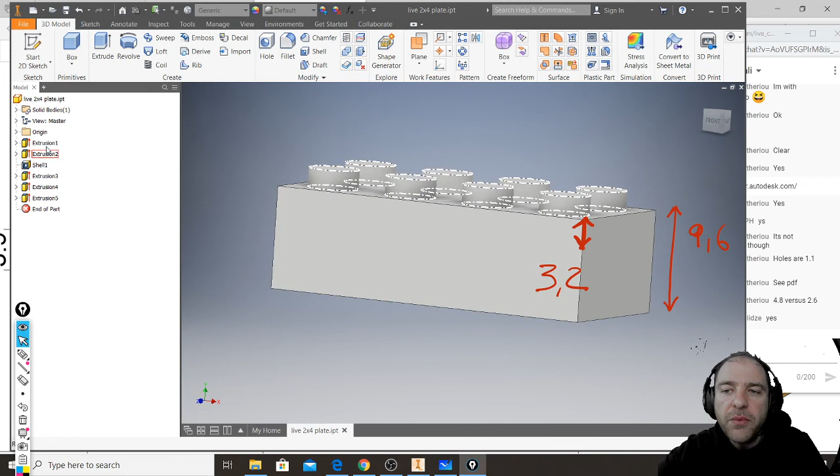Into the plate, this must become exactly 1/3, so it has to be 3.2. So the only thing that I will do to change this into the plate will be, I will go to the beginning. Remember, that is where I've made the big box. So I double click my original box and I see 9.6.

I change this to 3.2. I click OK. And without losing anything, but because all my other, and now this is 3.2, but because all my other sketches were depending on geometries that were there, I have nothing to redo, and I can simply create a second piece starting from that one.

Okay? Till here? And I will save it.

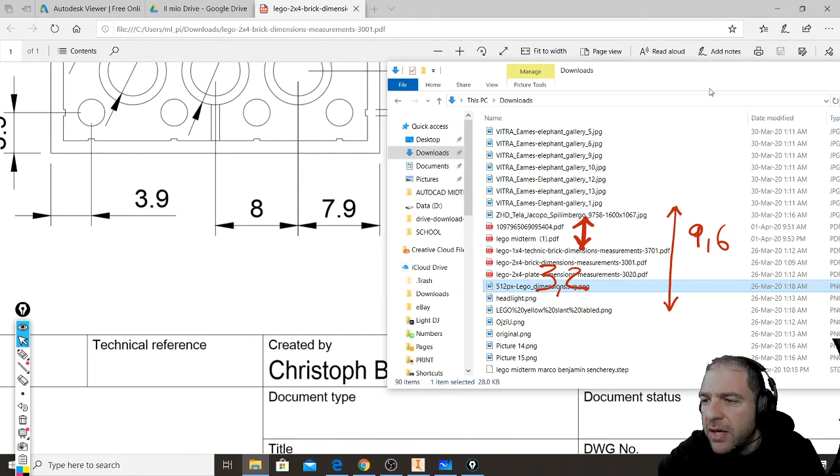Because if I remember, let me see... no, I've made the one that has the angle. Let me see if I can show you quickly the preview. I've made this one.

Open with photos. Then I want to just show you how I made this. That is fantastic. You want to see? In 3 seconds, how to make this element here.

I know the answer is yes, so check this out. I close the plate, I open my brick. Check this: to make the plate, let me delete this, I have just extruded the box. So in one click, I obtain another piece.

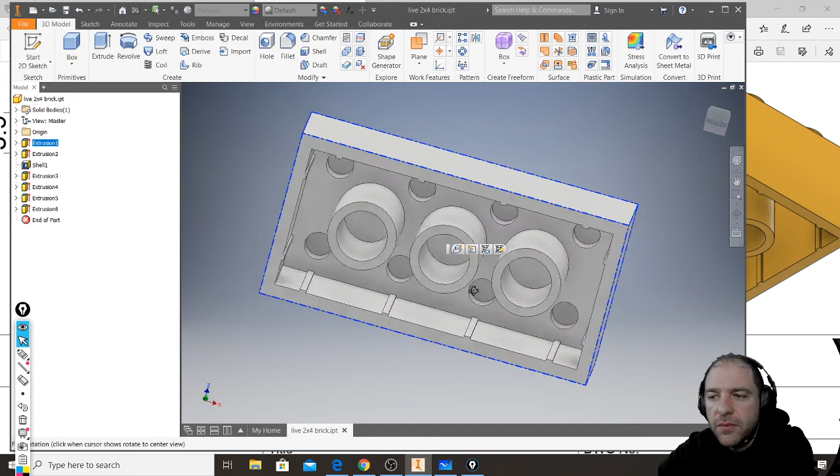To make the wedge, what I do is this: I remove this one because the wedge does not have it. I know this for a simple reason - I have Legos. Then I go here, I double click the sketch, and roughly delete everything except for one center circle.

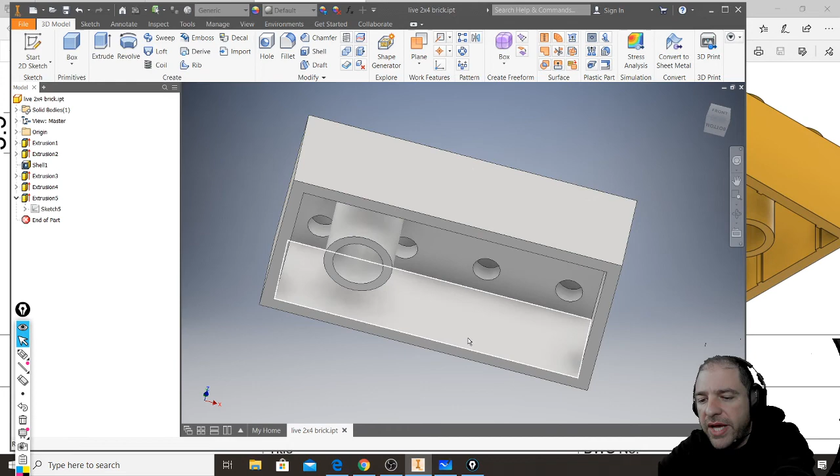Accept. And if this doesn't work, just double click extrusion and click OK again. Then I go here - this I will change later, this I will change later too. I go to my extrusions where there are 8 cylinders.

So I go here, sorry, I click the sketch, and again I roughly delete. I mean, I could just change them to construction, but I want to be super rude, and I will just delete them. Accept. And again if it makes these errors, double click on the function, click OK.

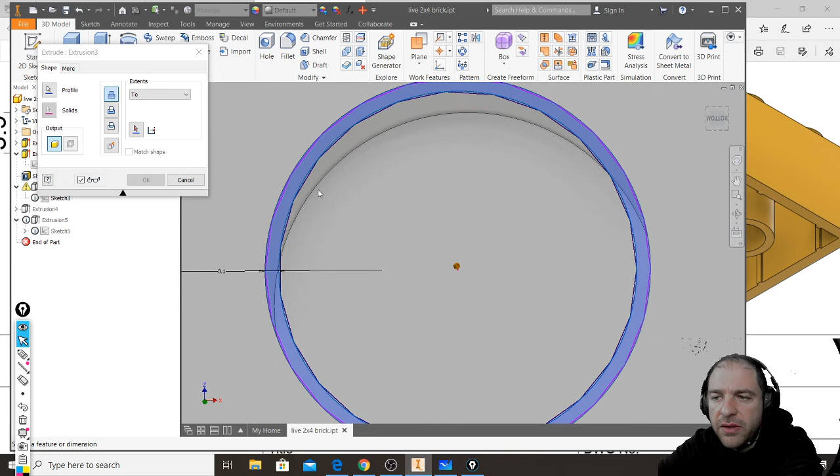We have almost done. Because now I don't have more of those, I also have to change this sketch, and I will delete these circles, click OK, accept, and again if this is red, double click. Select these and these, in here double click, yes, and here yes, to this face, click OK, perfect.

But the beautiful part is that in reality I have simply made something like this. That is, I remove for a second the shell, and what I do is I select this face, I make a sketch, and I use this picture. Oh, I've closed it. Exactly.

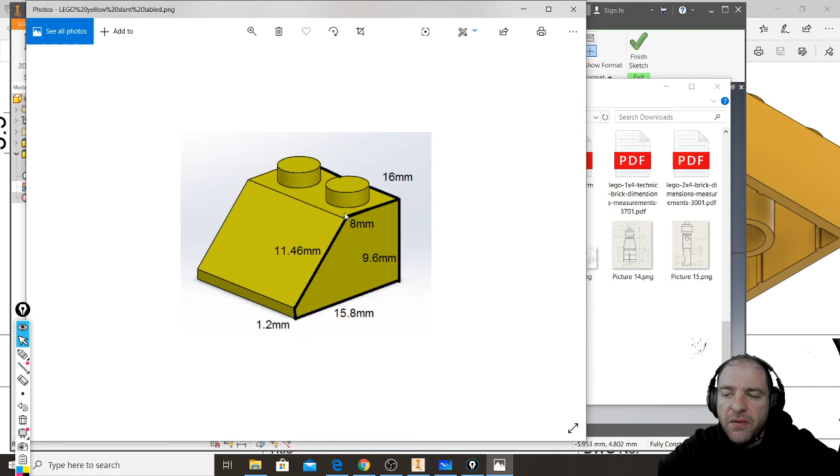I have this picture here where I can see that this is 15.8, then goes up 1.2 millimeters, and then it is 45 degrees angled. So, in Inventor, I make a sketch that goes from here.

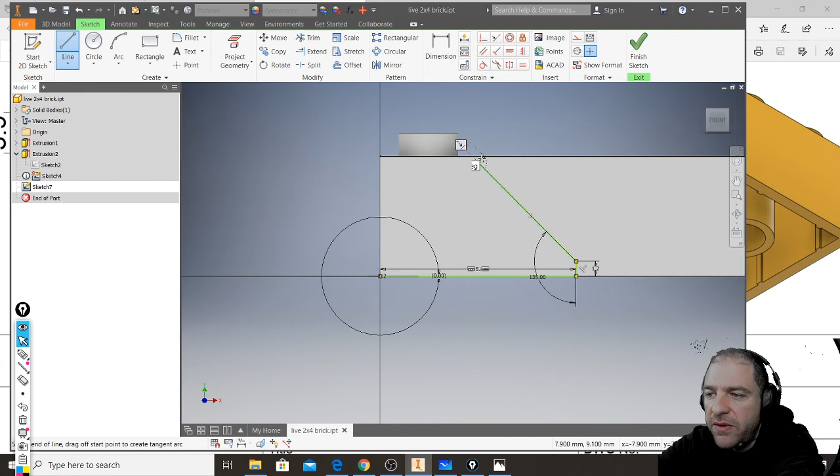It goes 15.8 millimeters horizontal, then it goes up 1.2 millimeters, then this line is 135 degrees - so I press tab and type 135 - and it goes till here.

Okay, then I draw up, up, up, up like this, and I close this line. I click finish, I extrude this weird shape, but I extrude it to this opposite face, and I cut it, and from a 2x4 brick I'm making the wedge.

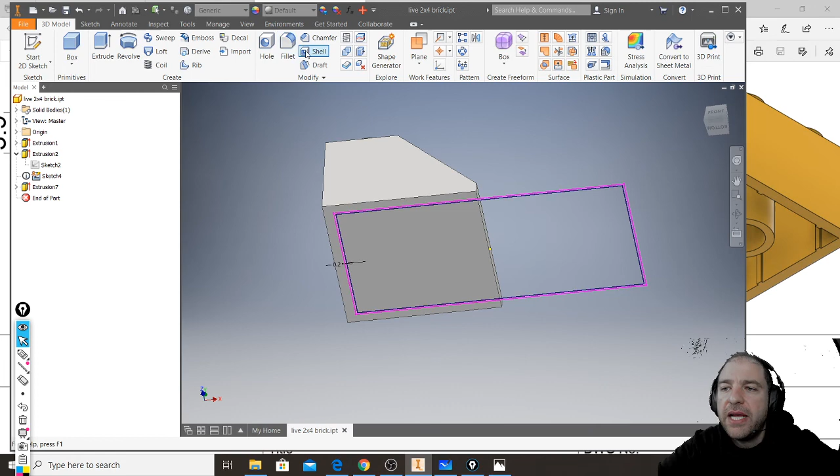Then look, I quickly repeat steps that I've done before, like I will make this shell. What I will do is, you can see that this shell now is 1 millimeter, but I have to be 1.2. So I select this sketch and I move this, or I just delete these and do it later on, so I can just finish the sketch. I will do this later, but basically I don't start from scratch.

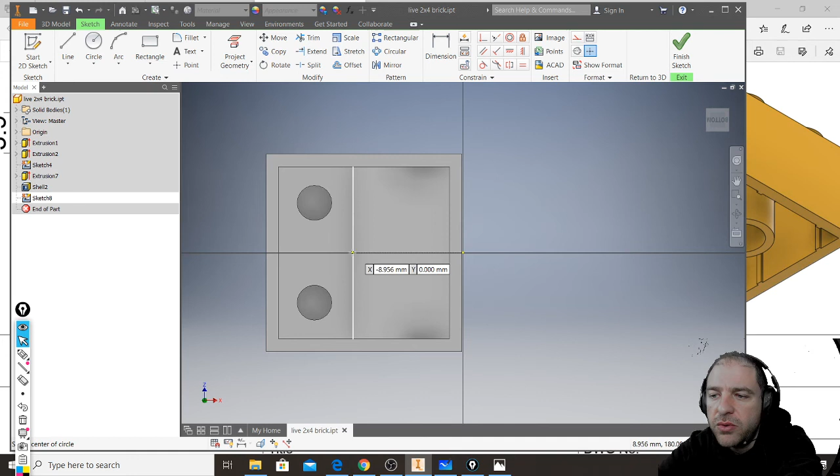Oops, I deleted too many things here. What I do is, now I make here a circle, just to show you one extremely important step only. So look, I just want to show you this step, that is 6.51, and another circle, 4.8. This is just one interesting thing, and then we will stop.

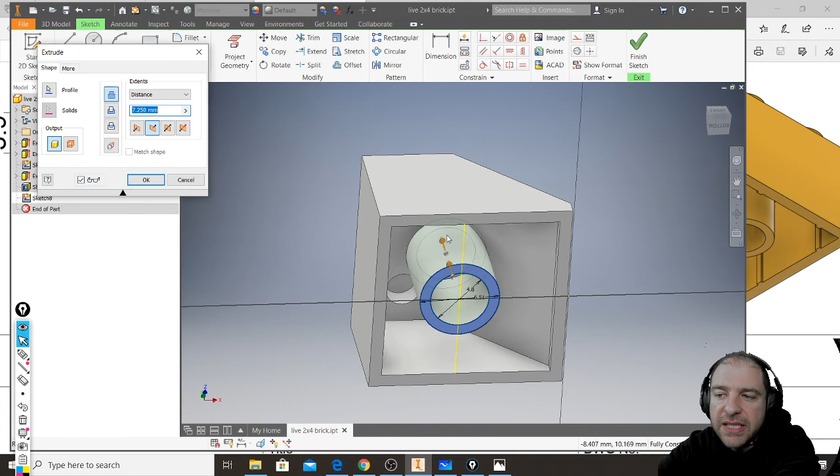If I extrude it, what is interesting about this wedge is that the angled face is angled. And if I use the option called To, and I select this face, this thing will go like this. Okay?

I want to show you just this small part because what is interesting is that when you use extrude, you can also use the option called 'to next'. So whatever obstacle the extrusion finds, no matter if it is an angled face or not, the extrusion will stop. And in one click, you have created a circular hollow extrusion that stops at both a flat and angled face.

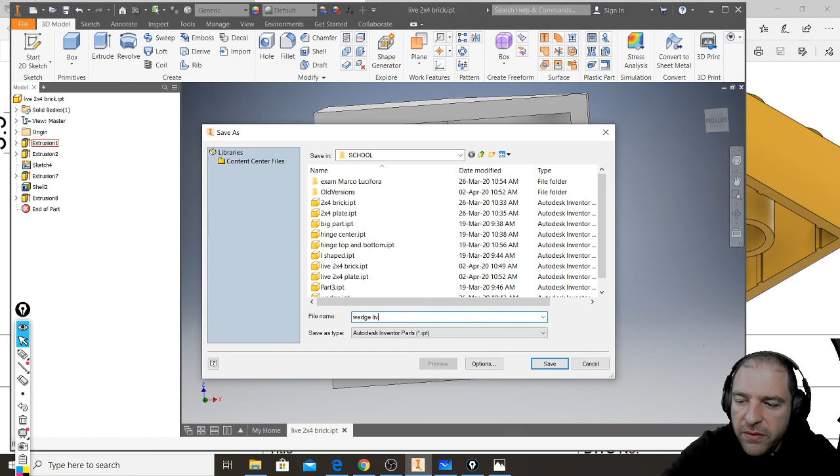Okay? And then I will save this as a wedge. So basically, from one original 2x4 brick, I have derived all other pieces. Okay? We have been a little bit too long, but I hope this will start helping you understand how many interesting ways there are to use Inventor.